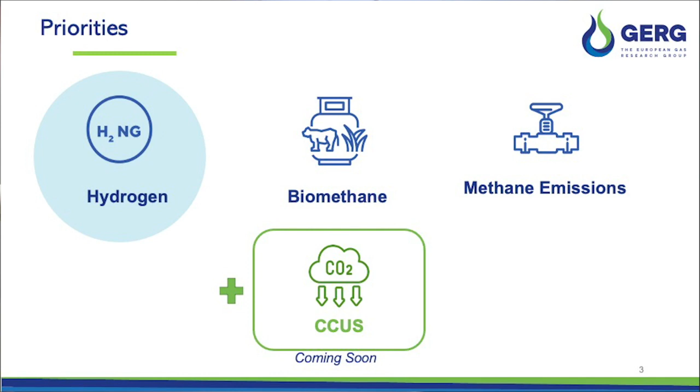And myself, I've been working for the association for 4 years, and we have developed a portfolio of projects. Our priorities lie mostly at the moment on these 4 categories.

We are developing carbon capture and storage as a new interest point for the association, but we're doing a lot on hydrogen, on biomethane, and on methane emissions.

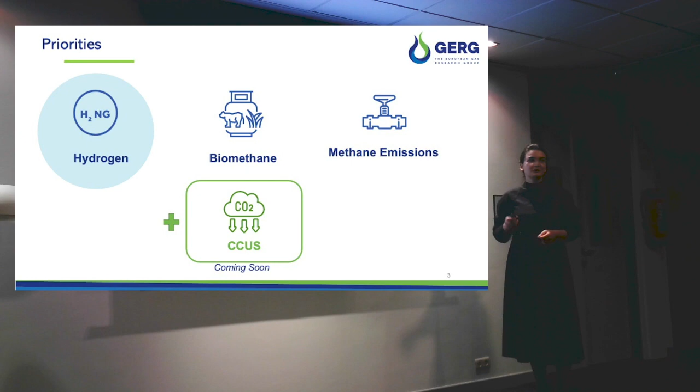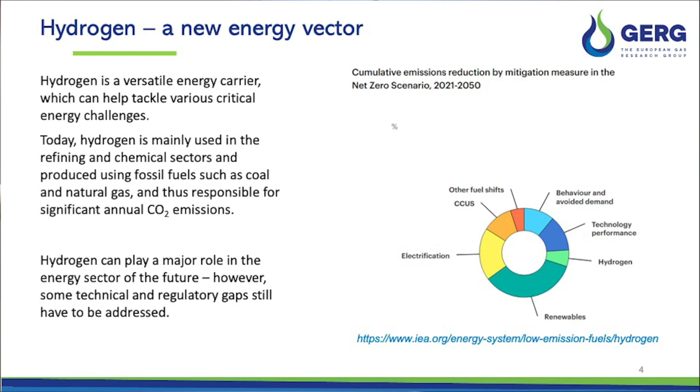So hydrogen, of course, is a main focus at the moment for the energy sector. Hydrogen is not something new for the chemical industry, of course. It is majorly present in the industry for chemical purposes. But in the energy sector, it is an up and coming topic. So it is an energy carrier that can solve a range of challenges. Of course, because of the combustion, it's not emitting harmful greenhouse gases.

And it depends on the modes of production of hydrogen, which are a big topic that we're not going to tackle today, but it's important to have clean hydrogen production and ramp it up to increase the savings of emissions from various use cases.

So here, this is a diagram from the International Energy Agency, just mentioning that hydrogen is, of course, not a silver bullet, not the only solution, but it is an important part of the range of solutions that have to be implemented in order to reach the scenarios of reduction of emissions, next to the introduction of renewable energy sources, electrification, carbon capture and storage, and other solutions.

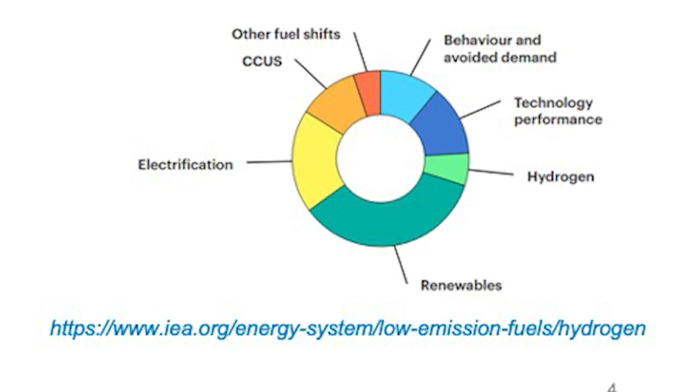And from our side, we have been looking at production, or the whole hydrogen as an energy vector value chain, which is still being under development. So we have the production of hydrogen, the transport, the storage, and the utilization.

The project that I would like to present tonight was a 3-year project that was funded by the Clean Hydrogen Partnership, in which we were, as an association, a member. And it focused on the end part of the value chain, so the utilization of hydrogen, in particular in its version of blended with the natural gas.

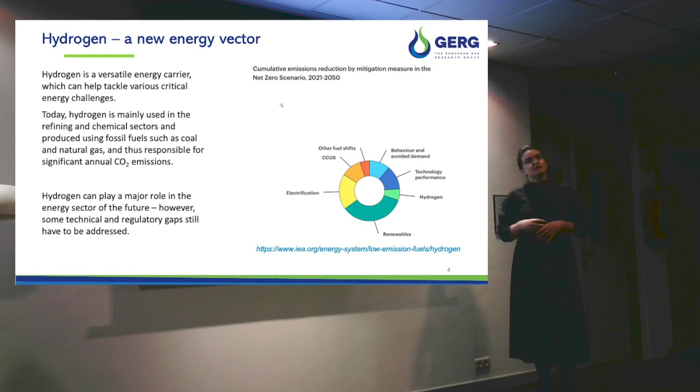So this is a way of getting hydrogen into the existing networks, which is just to introduce a percentage of hydrogen into the existing natural gas network. And the question was, how then do we deal with the endpoints of the utilization of this new mixture, and how does the equipment deal with the changed gas qualities and other elements that can be impacted by switching from natural gas, mostly methane, to a natural gas hydrogen mixture.

So this is the project in question. It was called THyGA, as in Testing Hydrogen Admixture for Gas Applications, which received funding from the Clean Hydrogen Partnership and the European Commission.

So the objective starts with the idea that introducing hydrogen into the natural gas, the existing energy network, is a way to increase immediately the demand for hydrogen, because of course we have the issue of increasing the demand and increasing the supply of hydrogen, clean hydrogen in particular, to go towards our energy transition goals. And including it into the gas grid provides an already existing way of utilizing this produced hydrogen.

However, even though the percentages might not be very high, we will see later, any introduction, even a small percentage or volume of hydrogen introduced into the gas grid, due to the very high volumes of gas that is being utilized across the European Union, would already provide a consequent reduction of CO2 footprint from the utilization of this mixture.

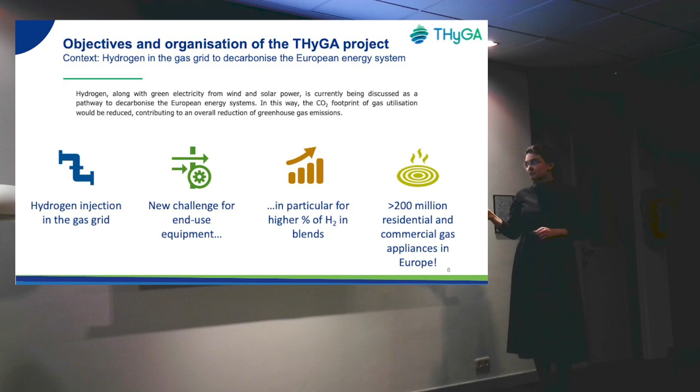But it does pose a challenge for the end-use equipment, in particular for higher percentages of hydrogen that were not included into the specifications of equipment when it was manufactured, because it was never planned that it would be used for these mixtures. So that was the objective of the project, to research the impacts of this blending and utilization. The focus for this project was on residential and commercial gas applications, which is a considerable market of more than 200 million appliances installed at the moment in Europe.

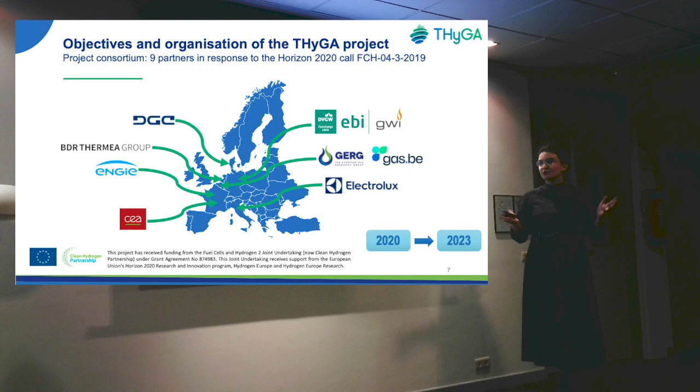So this is the consortium that did the work. We have gas companies, consultancy research groups, and GERG, the European Gas Research Group, as an association, and gas.be, a Belgian gas association, which you may be familiar with. It ran from 2020 to 2023, and as you can see, with some geographical diversity of the partners.

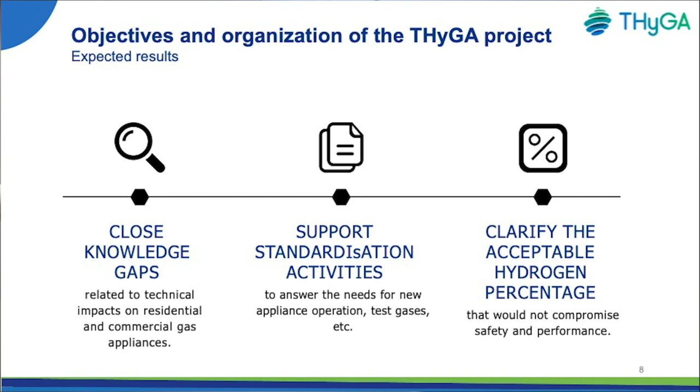So, to summarize the objectives of the project, we wanted to close the knowledge gaps related to the technical impacts on residential and commercial gas appliances, support the standardization activities to formalize the standardization actions needed to certify the appliances for use with hydrogen blending, which is of course necessary to actually implement in real life this solution of blending hydrogen and natural gas. And study the acceptable hydrogen percentage, with quite a high variation in terms of the percentage included in the mixtures.

So very quickly, this is the structure of the project. What is interesting for us is that the project did a study of the status of gas utilization technologies. We will see in a couple of slides that it was quite a broad spectrum of various technologies, various applications for cooking, for heating, and all the various types of appliances in those categories. And did some literature research about the existing data for these applications,

which was supplemented by a very extensive experimental work program. There was a focus on studying the existing standardization rules concerning these applications and how hydrogen would impact them, as well as what needs to be modified for the new standardization to fit our new vision for the system. And recommendations for mitigation measures, so technical as well as standardization recommendations, and standard work package activities, project management, and communication, dissemination, exploitation.

This project was actively supported by an advisory panel group, which is usual. Here it was very useful because in the advisory panel group we had a lot of manufacturers who were very helpful by providing equipment for testing, which allowed the project to have a lot of actual equipment to test the various hydrogen blends on.

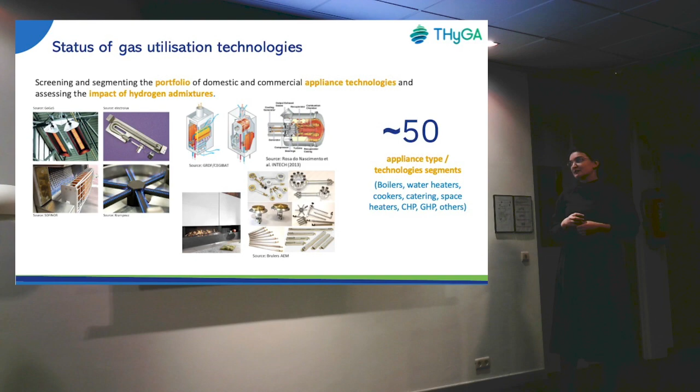So this was the starting point of the project: to screen and to segment a very large portfolio of domestic and commercial gas appliances. So we had boilers, water heaters, cookers, catering appliances, space heaters, etc. So more than 50 appliance technology segments, and for all of those there was literature research, particularly on combustion theory for hydrogen mixtures and the impact on the one side and impact on the materials on the other.

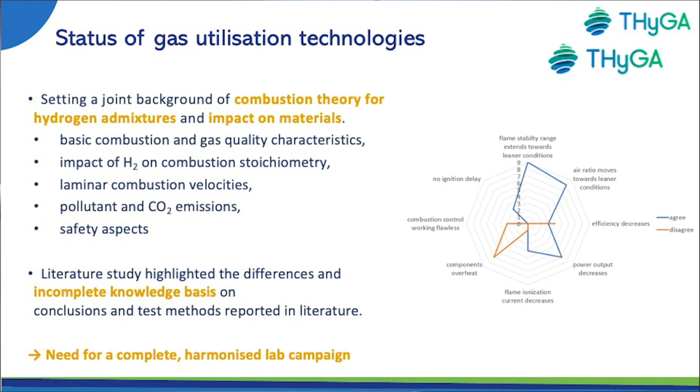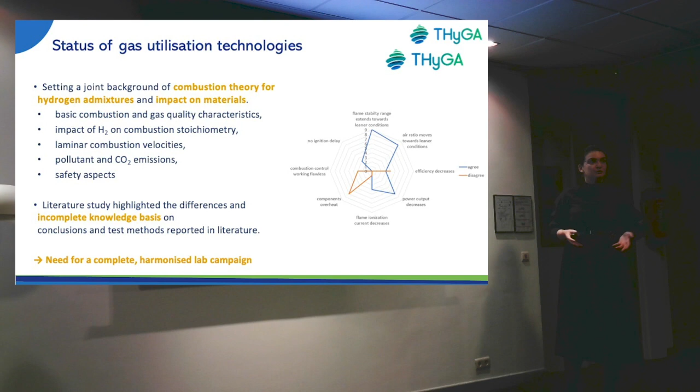So some of the topics that were researched were the combustion and gas quality characteristics, the impact of hydrogen on combustion stoichiometry, the laminar combustion velocities, pollutant emissions, CO2 and others, and safety aspects. So the conclusions were that there wasn't consistent data and there wasn't enough data existing about these topics, at least accessible in a published way. So this justified the research done in the project shown in the following slides.

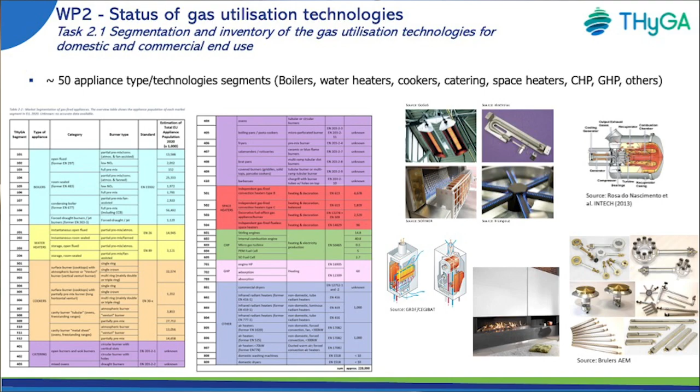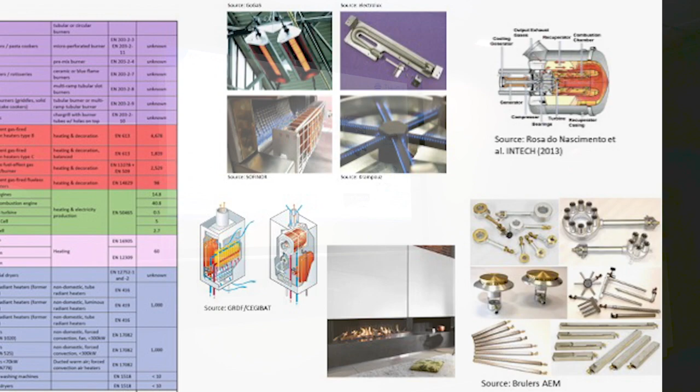So this is not readable, of course, just to give a view of the impact of the work. So for each of the segments of appliances, we had a classification that was developed for the project and was used later in the testing program.

So one topic that I will detail a little bit more is the combustion theory. This was done, before the experimental testing was produced, through some studies about the impact of hydrogen on basic combustion and gas quality characteristics, in particular combustion stoichiometry, laminar combustion velocities, pollution and safety.

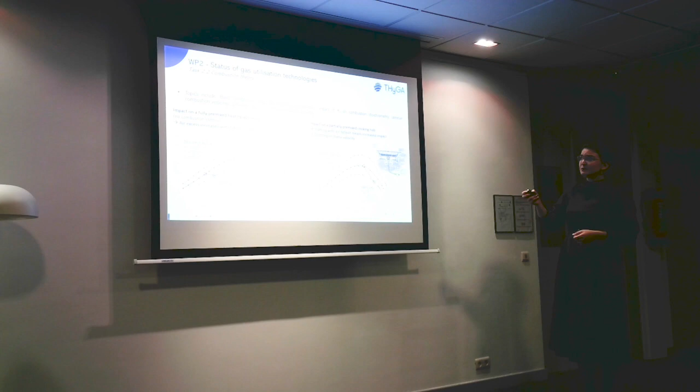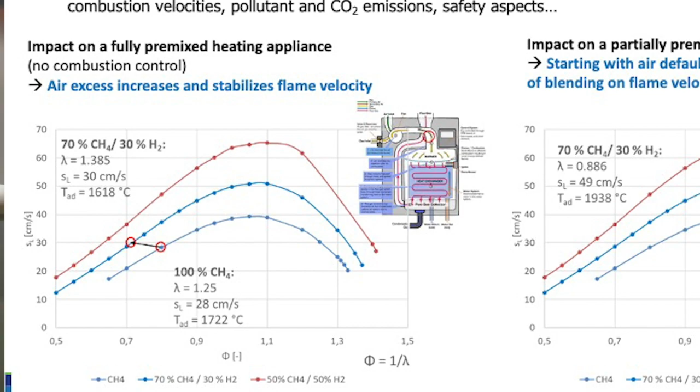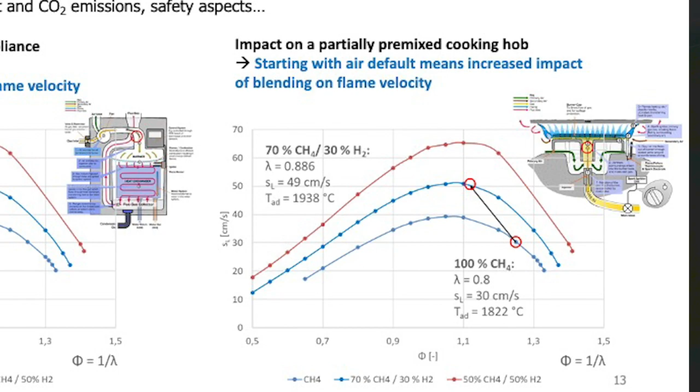So as an example, here on the graphic on the left, you see three lines. The bottom line corresponds to pure methane. The second one, a blend of 30% hydrogen, 70% methane in volume, and the red one on the top to 50% of each gas. So we see that because of the different characteristics of hydrogen and methane, the impact on the combustion. What are the abscissa and the ordinates? Sorry. Yes. On the graph, that might help us to understand it.

Yes, absolutely. So we have here a graph of the laminar combustion velocity linked to the stoichiometry of the reaction, which is what is illustrated here. That depending on the condition, we can't just say if we have 30% of hydrogen, we will have this effect, because it is really a range of conditions that are in play.

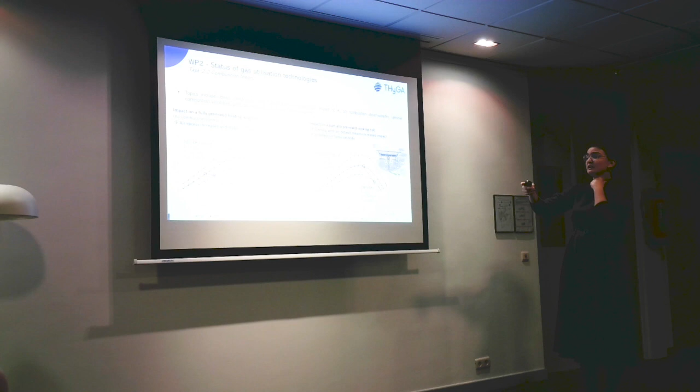One of them being the stoichiometry operating conditions, because we see here that this is for a premixed heating appliance which is operating in air excess. So if we go from pure methane to 30% of hydrogen, these two points linked by the arrow, we increase the air excess ratio, but it does also go towards higher stoichiometry operating conditions, which means that the increase in the laminar velocity is actually counteracted. So the two effects are counteracting each other, and we don't see a huge increase in the laminar velocity.

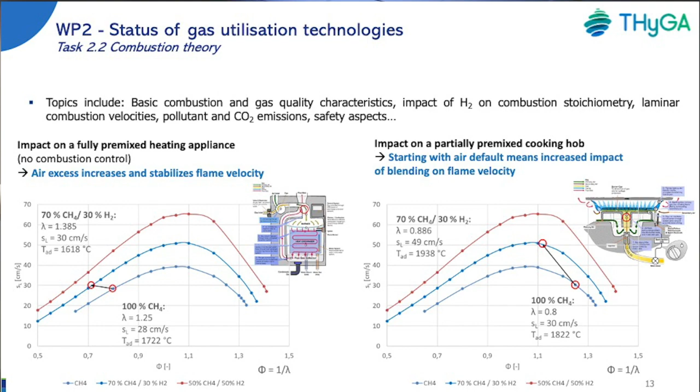Whereas here, for a partially premixed cooking hob, we are operating at sub-stoichiometric conditions, and therefore the laminar velocity is actually increased. So the two effects are increasing the effect of the introduction of hydrogen into the mix. So this is to say that for this topic, a real focus of the project was dealing with the operating conditions of the equipment.

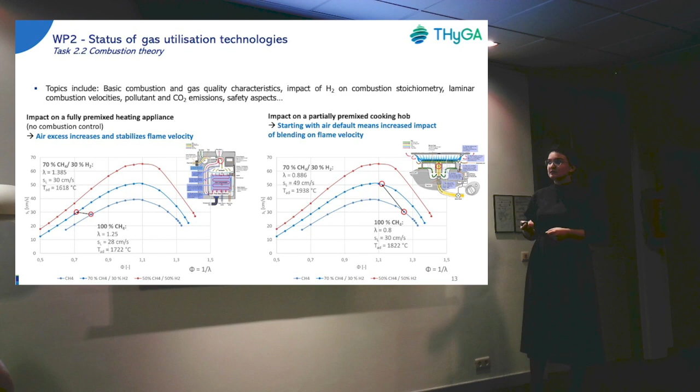So, for example, we will see later that the adjustment of the equipment at its installation was identified as a major element of making this switch to blends of hydrogen work, which of course is a challenge because it requires some focus on individual pieces of equipment, so some review by qualified personnel who will be able to make that check or to certify that the appliance will be operating under the right conditions.

So the experimental work program of the project was created taking lessons learned from previous projects, European funded in particular, and the literature review on combustion science information. An experimental protocol was then created with the THyGA members and laboratories in the project. And we had a feedback loop with the advisory group, with a review after the first test, that created a final version of the test protocol used in the project.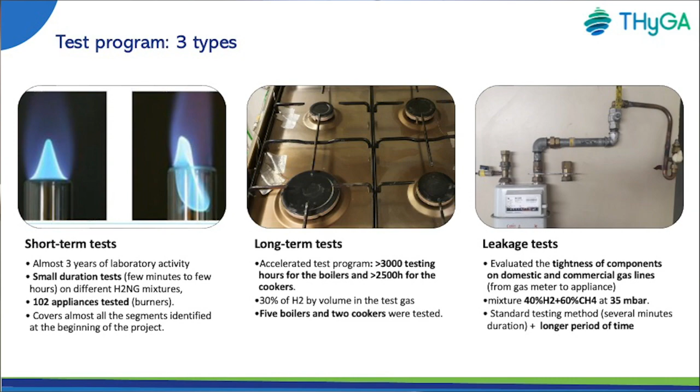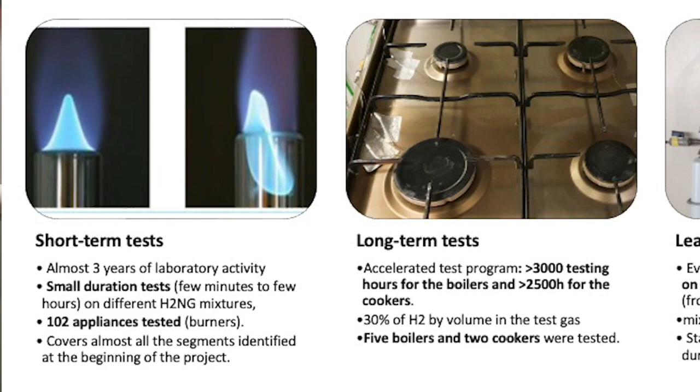So three types of tests were made during the program. We had short-term tests, of small duration, a few minutes to a few hours, on different hydrogen and natural gas mixtures. More than 100 appliances were tested, burners in particular, and they covered almost all the segments identified at the beginning of the project. Long-term tests were done in the project, which was very interesting to provide a very long-term view of the actual operational impact on the appliance.

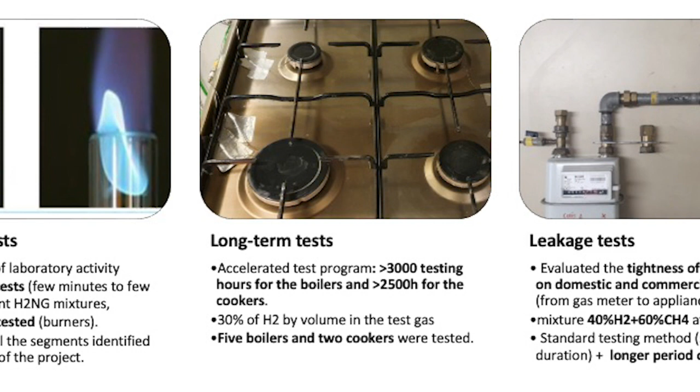So combining more than 3,000 hours of testing for the boilers and 2,500 hours for the cookers. This was done with 30% of hydrogen by volume in test gas. Of course, due to the long duration of the tests, there was less opportunity to have different test mixtures tested. So this was done on 5 boilers and 2 cookers.

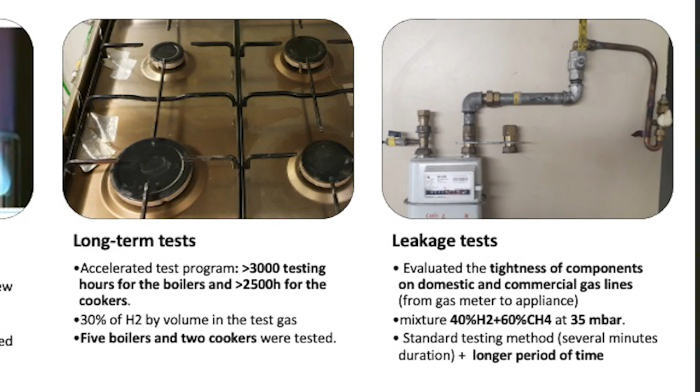And finally, there was a small part of the project that also looked at leakage tests, specifically on the part of the network which is at the very end before the customer, so the domestic and commercial gas line that goes to the appliance. This also had two durations, one short duration and also longer periods of time.

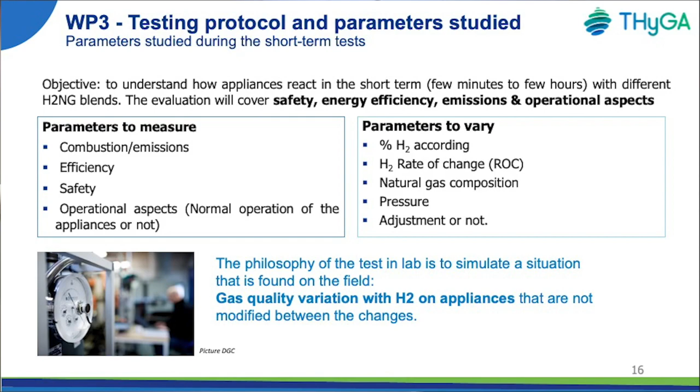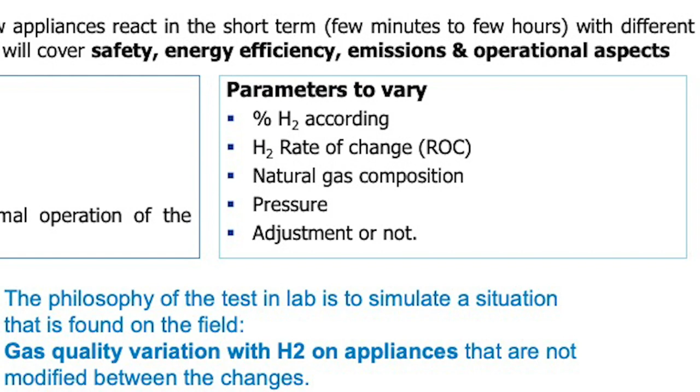So the different parameters of the test program were to look at combustion, efficiency, safety, and the operational aspects, so also from the point of view of the user, was there anything significantly different in using their appliance with natural gas or with natural gas and hydrogen. The parameters that were varied were the percentage of hydrogen, the rate of change of the hydrogen percentage in the mixture, the natural gas composition, the pressure, and whether the appliance had been adjusted or not.

So we had all of these different parameters to be tested during the test program, which is quite a lot, with many different appliances, many different segments, so it was a major undertaking. Some of the parameters were tested with more data than others, which was determined through the study of the actual appliances in the field.

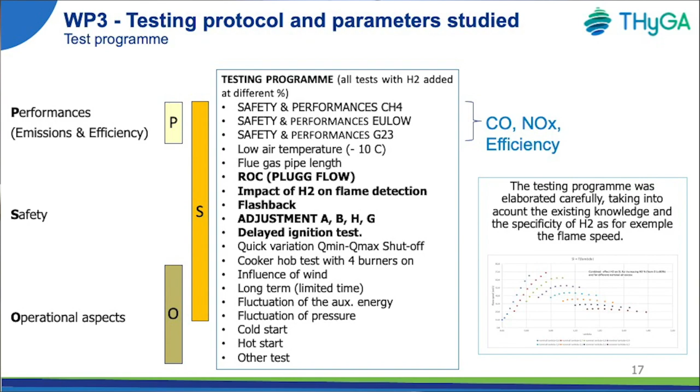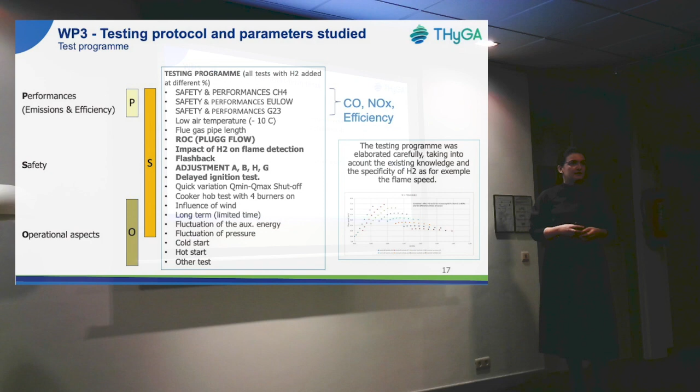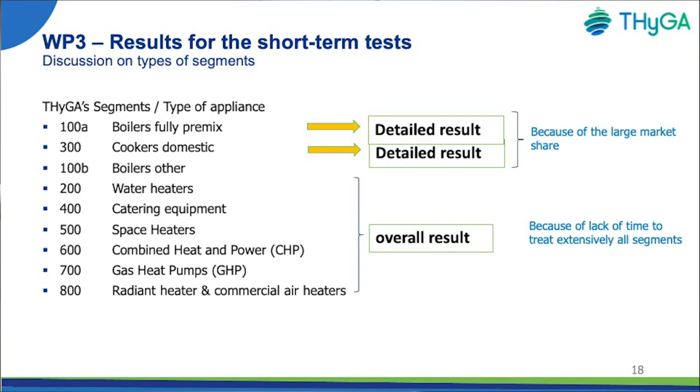So the project focused on the most well represented, the most important gas appliances actually installed in homes or in businesses. So the fully premixed boilers and the domestic cookers were the most well tested appliances. So we have detailed results available from the project deliverables, and the data gathered on all the other equipment was also published, of course, but it isn't as exhaustive.

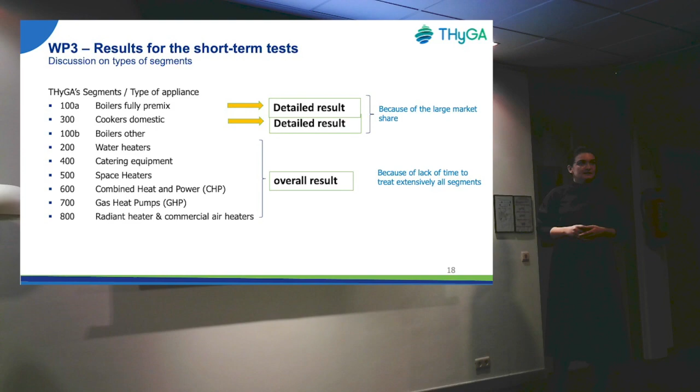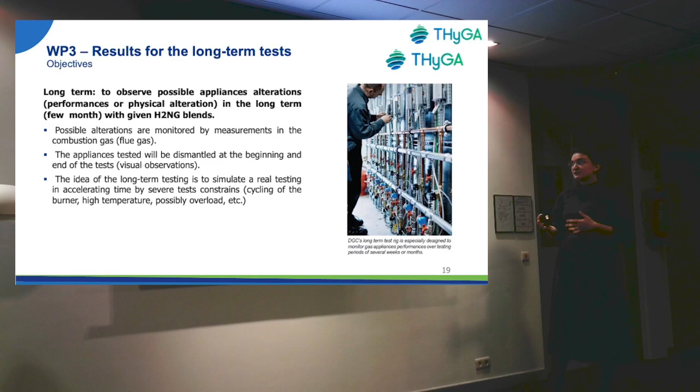So for the first type of test, the long-term test, the idea was to observe possible appliance alterations in the long term with the use of blends, which were monitored by measurement of the flue gas composition. The appliances were dismantled at the beginning and at the end of the test, with some visual observations as well. And the philosophy of the test was to simulate a real-life situation, so also with the duration of the test, but also putting the equipment through various modes of operation.

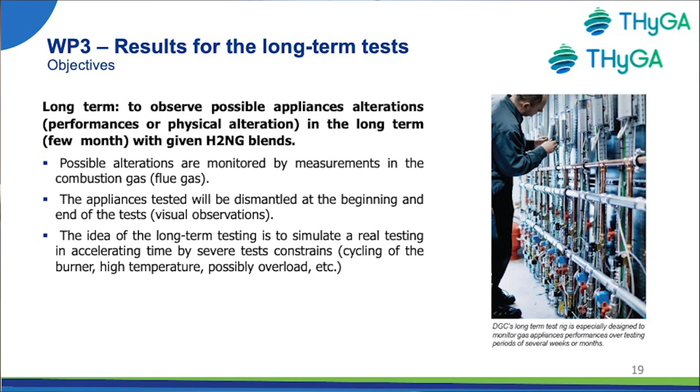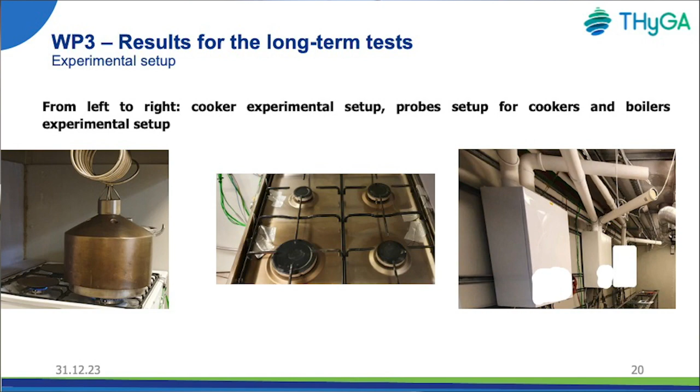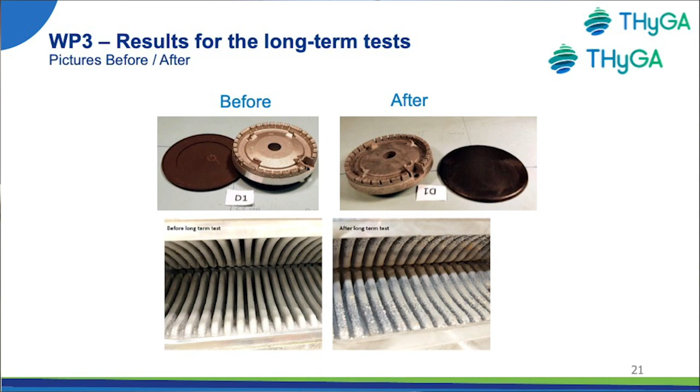So high temperature, possibly overload, etc. And we have some pictures here of the actual test setup. So the experimental setup for the cookers, and a boiler experimental setup. And here is some before and after, like in the ads, of the pieces of equipment, which also allowed the visual observation of the impact on the pieces of equipment.

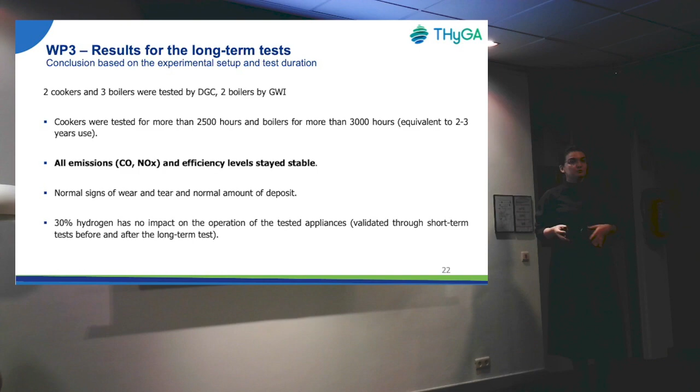The conclusions of this long-term test were that, so the pieces of equipment tested were 2 cookers and 3 boilers by one company, and 2 boilers by another one. All the emissions and efficiency levels stayed stable, which was a very interesting result. So there wasn't any quantifiable increase or issues related to the share of hydrogen, which was 30% for this test. There are signs of wear and tear, but they are consistent with use with just natural gas. And we can conclude from this test that a 30% hydrogen share didn't have any impact on the operation of the appliances.

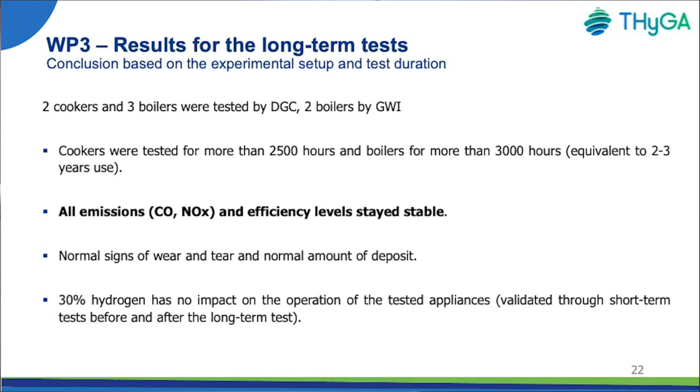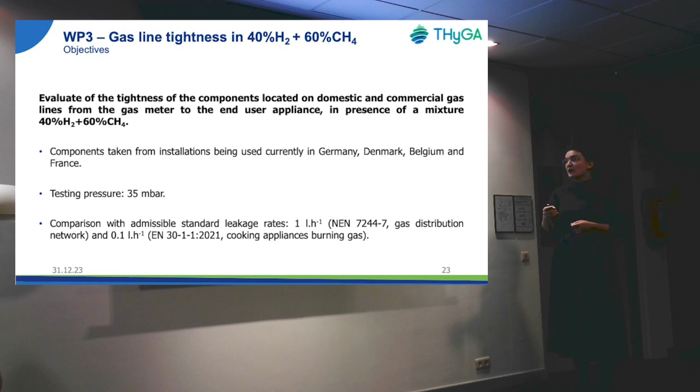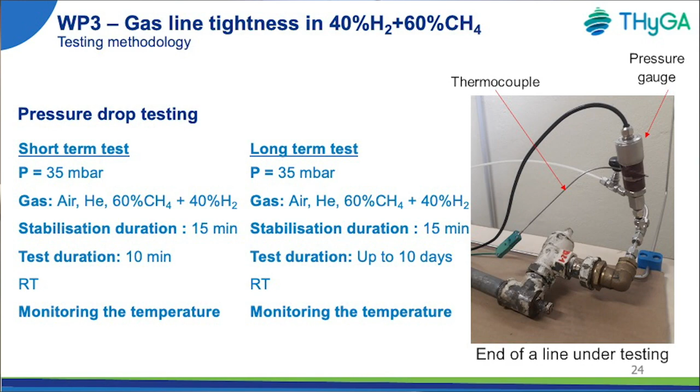For the gas line tightness, they wanted to test the possibility of leakage. Would it be increased with the presence of hydrogen, because hydrogen is of course a smaller molecule than CH4. However, for the parameters of our test, which were tested under 35 millibar, 40% hydrogen and 60% methane was the blend that was tested under those specific parameters. So there was a short-term test and a long-term test, one for 10 minutes and the other up to 10 days. You can see here the experimental setup.

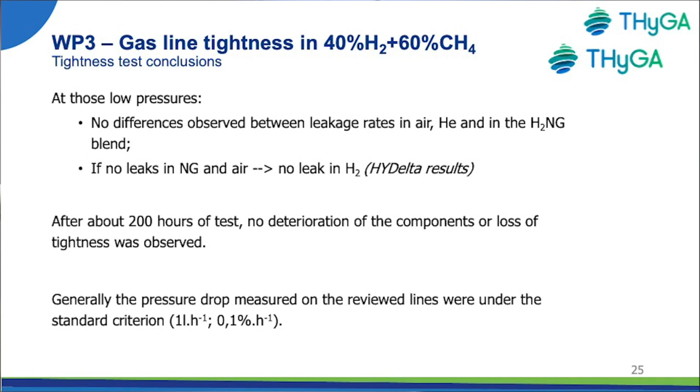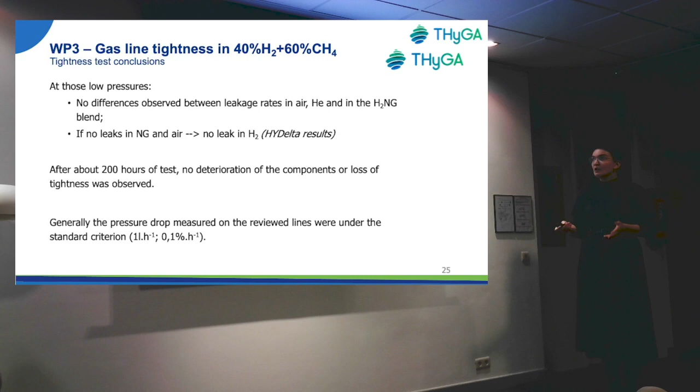And the results were that at those relatively low pressures, which correspond to the reality of an installation in a home, there were no differences observed between leakage rates with air, helium, and the hydrogen natural gas mix. And we have some results from another European project, HyDelta, that concluded that if no leaks are observed with natural gas and air, there shouldn't be leaks for hydrogen. More than 200 hours of testing were done, without observation of deterioration of the components or loss of tightness. Therefore, we can conclude these are very positive results, consistent with normal operation of the equipment.

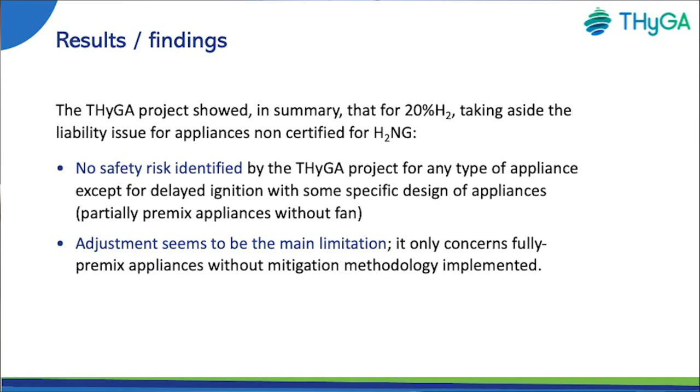In general, the THyGA project showed that for 20% hydrogen, taking aside the liability issue, which I will mention later, we have identified no safety risk for any type of appliance except for delayed ignition with some specific designs of appliances, partially premix appliances without a fan. And adjustment of appliances is the main limitation. It only concerns fully premix appliances without a mitigation methodology, and we have in our deliverables a detailed description of a recommended mitigation measure which could be applied to deal with this particular issue.

So the conclusions are that this project was interesting, with a big collaboration between several European partners and a very extensive test campaign: around 100 different appliances, a variety of systems, a variety of hydrogen and natural gas blends. But of course, that was just a small part of the whole range of installed appliances, and there could be funding programs that go further into exploring other types of appliances, other operating procedures, other types of gas blends.

We have concluded that blending up to 20% hydrogen is technically feasible, but implementation would need collaboration with the transportation companies, the energy providers, the member states. And finally, 2 topics should be addressed by all stakeholders: the liability and the adjustment. So first of all, the liability. Here we go a little bit out of the technical field, into the real life field.

Even though the technical results seem to point that installed appliances can technically cope with 20% hydrogen, some liability issues remain. Currently there are regulations in place, the gas appliance regulation, for example, and under it the existing gas appliances did not have to be designed for use with hydrogen blends. It wasn't foreseen. So hydrogen and natural gas blend supply cannot be considered as normal use. So manufacturers of those appliances would not be liable for any negative impact caused by the introduction of hydrogen to the system.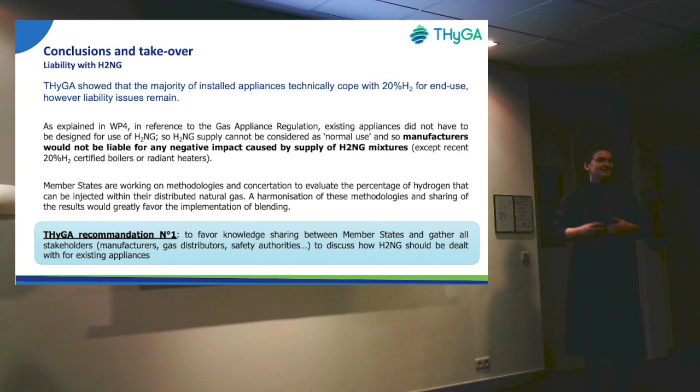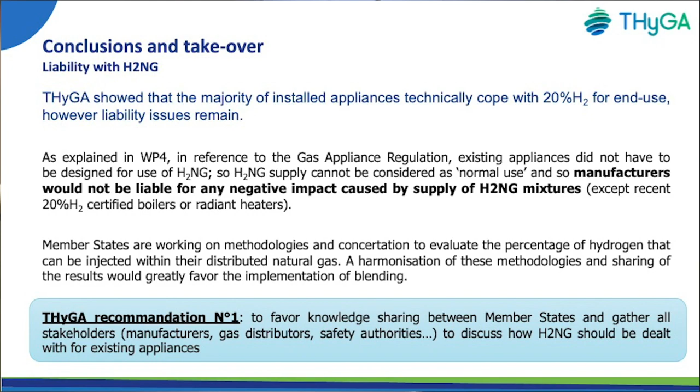Except some new appliances on the market developed today that are certified for 20% hydrogen or even 20% to 100% hydrogen, which is done by some manufacturers in preparation for the switch of the networks. But the situation remains that for the appliances installed today, we have this liability issue. The member states are working on methodologies and consultations to evaluate the percentage of hydrogen that can be injected with distributed natural gas. And we need a harmonized decision on these methodologies and sharing of results to actually implement blending in the networks. So this is the first recommendation of the project.

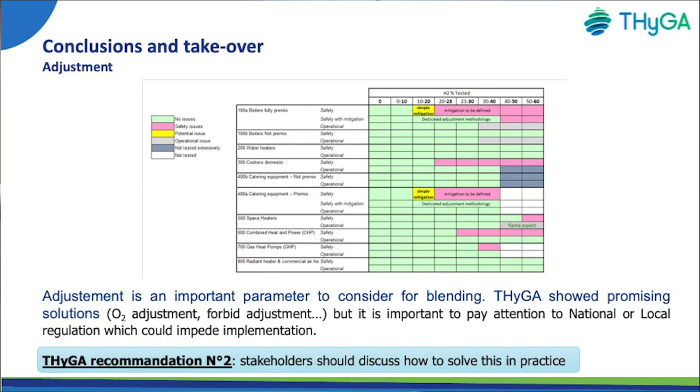And the second recommendation is on adjustment. So adjustment is an important parameter for blending. THyGA showed promising solutions that are detailed in our deliverables.

So some adjustments with oxygen, the instruction for the installers not to adjust the equipment when it is installed. But it is important to pay attention to national and local regulation, which could make this implementation more difficult.

So this is an open issue that the project has highlighted, and it also needs to be decided in consultation by a range of stakeholders. At European level, we are actually at the moment having some discussion at the Commission and Parliament level on the hydrogen strategy, which will define the levels of blending, or not, that are acceptable.

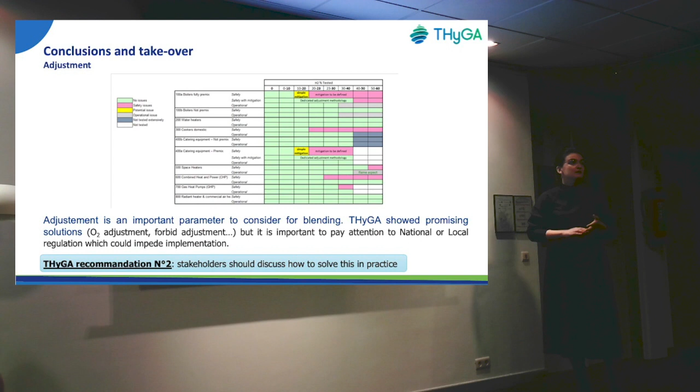And then it will be a decision of member states. And then we need to have collaboration between all the actors of the sector - the transport companies, the manufacturers - and of course with the approval of the consumer population, which might be impacted by all these decisions.

So that was for the THyGA project. We have, as I said, not only hydrogen as an activity for our group, but it is part of the process that GERG is working on, to identify common topics of interest.

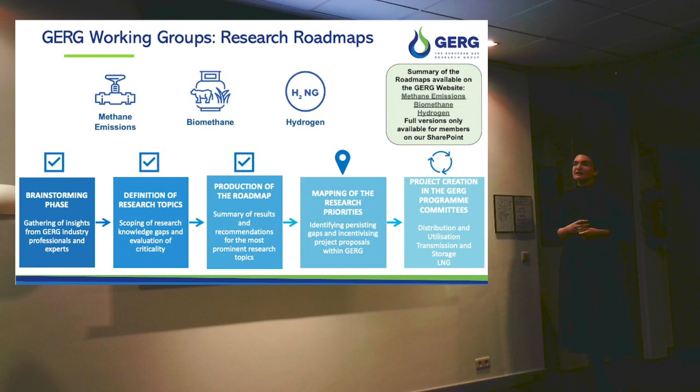Define those research topics, and we produce internally research roadmaps that are aimed at solving these common problems for the industry and the energy sector in general, and create collaboratively funded projects. Some of our publications are available on the website.

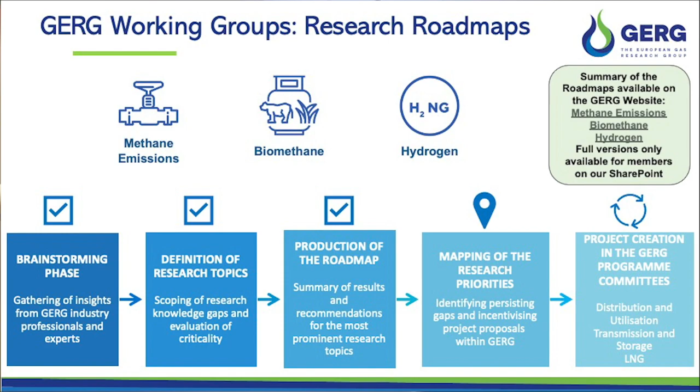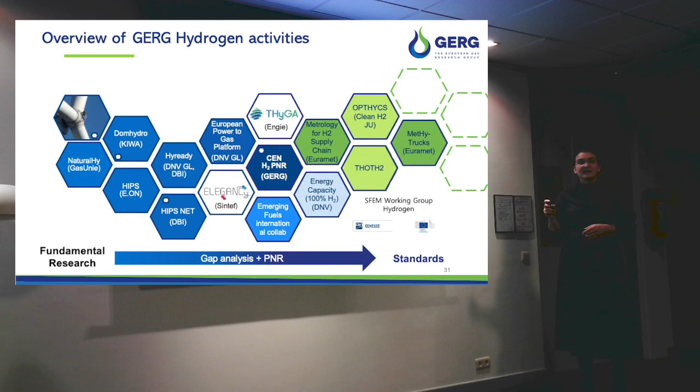We are also working on the impact of blending on transport, on materials, on mitigation of leakage, both of methane and hydrogen. We have the OPTHYCS project, which deals with the detection of hydrogen leakage from transport infrastructure using fiber optic technology, and a variety of different topics ranging from fundamental research.

Our objective is to bring it to usable recommendations, in particular for the standards, which of course is a very important step to actually bring it to market and to reality.

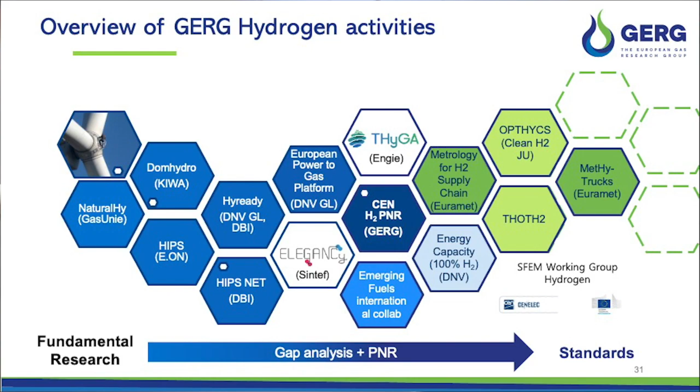And to learn more, you can visit the THyGA website, which I would recommend if you're interested in the project, because everything has been published and all the data is open. The project partners did a very good job of also making the data sets available, so if you want to go and look into the actual results of the testing.

It's at Brussels Expo, and they have a lot of talks, a lot of events. The Energy Fair is still open until tomorrow, 9 to 8 p.m. And on Friday it's virtual. It is a very interesting visual representation of the impact of hydrogen in our energy system, because it is quite impressive the number of presenters and projects and talks that it is generating.

And I will stop there. I'll be happy to take any questions. Thank you very much.

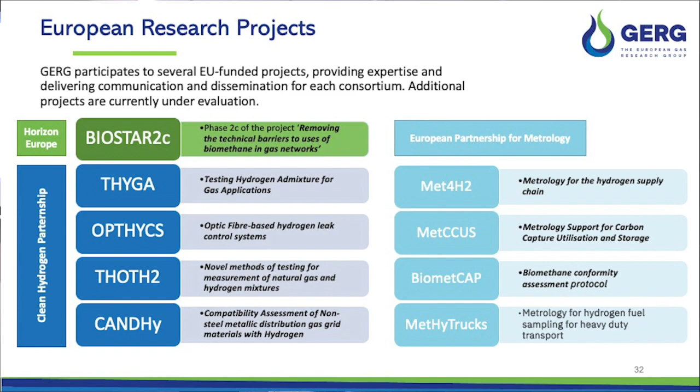We have the OPTHYCS project that I mentioned, which is also European funded. It's called the Clean Hydrogen Partnership, and it is dedicated to detecting hydrogen leakage from pipelines, which was commissioned by the European Commission and the funding program, because it is something that needs to be really checked before we put hydrogen networks into operation. Hydrogen is a smaller molecule than natural gas, so we have to see if our existing systems are adequate for detecting leakages and preventing them.

That specific project is looking at a very innovative way, which is to use fiber optic technology. You run a fiber optic line next to your pipeline, and thanks to a specific coating on the fiber optic strand, it will react to hydrogen if it gets emitted. You can then analyze the signal that you get back and make the detection quite efficiently, without any moving parts or equipment on the pipeline, and you can cover quite a long distance of the equipment with the system. So we're quite excited about that.

Just wanted to ask, in your opinion, how long would it be, how soon we might be able to convert to the technology, say in Belgium? Are we looking at 10 years, 20, 5?